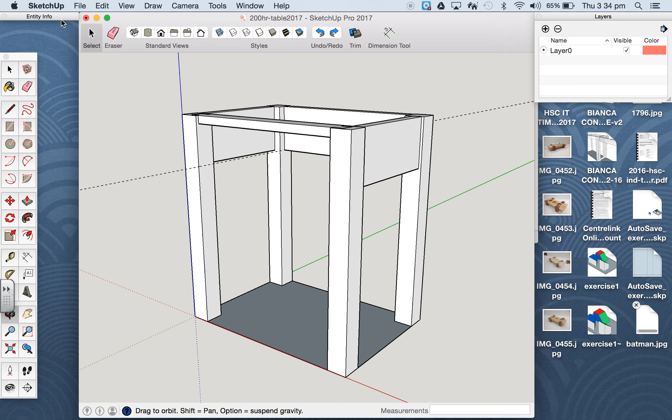Okay, so we're going to carry on with the table drawing. The next piece we're going to draw is the divider at the bottom of the drawer that goes from one side to the other. Notice I've placed a guideline here. That guideline is level with the bottom of the back rail there, 100 millimeters down from the top.

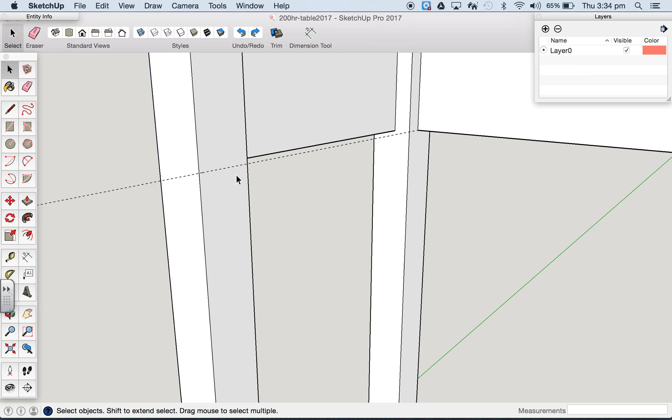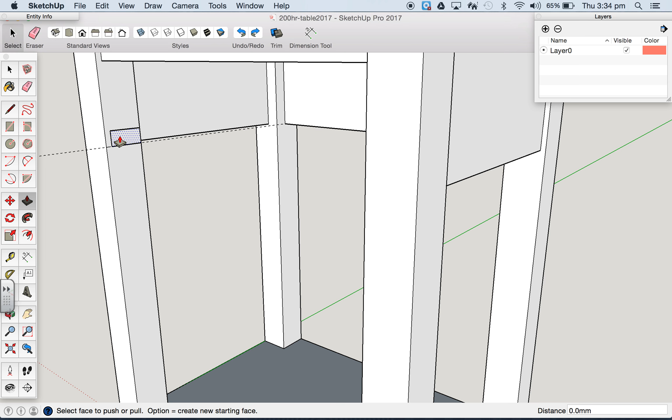We're going to start by drawing a rectangle from the intersection of that guideline at the back of the leg, going forward, and we're going to make that 16 millimeters high and 34 millimeters deep. Now notice that when I did that, I didn't have the leg in edit mode, so it's not actually part of the leg, although I drew it on the leg. I'm allowed to push pull across and touch the front of this leg, which means that it now spans between the two legs. It's touching the inside, but not going any further.

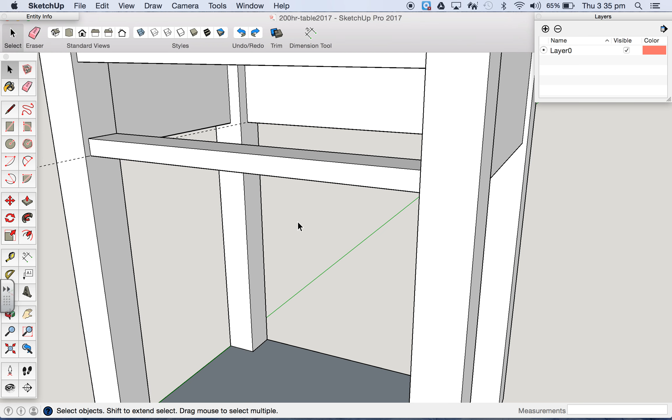Going to make that a component, or in this case no, just a group would be fine. So triple click, make group. Now I'm going to put some tenons on the end of it. So I need to open that in edit mode. Notice I've got the view options of component edit as hide rest of model. I'm now going to go around to the side here. I'm going to draw a tenon on the side here. I'm going to put a guideline in from the top. I'm going to come down 5 mils and do a rectangle from the back here.

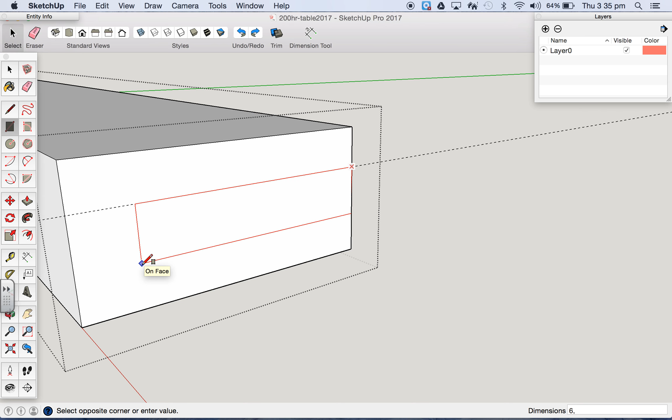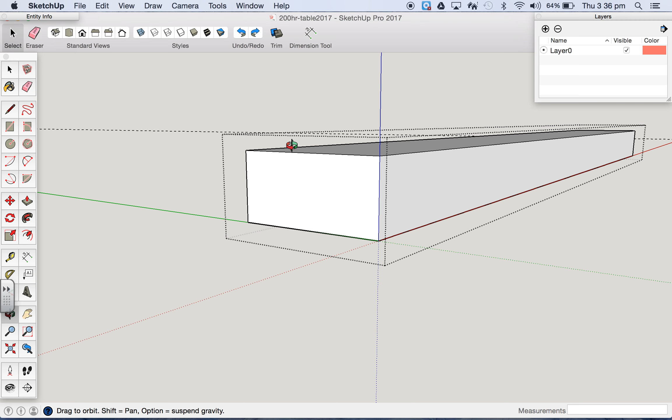And that will be six, 30. Push pull will come out 15 millimeters, and we'll do the same on the other end. Guideline from the top, 5 mils, and a rectangle. 6, 30. Push pull, 15 mils.

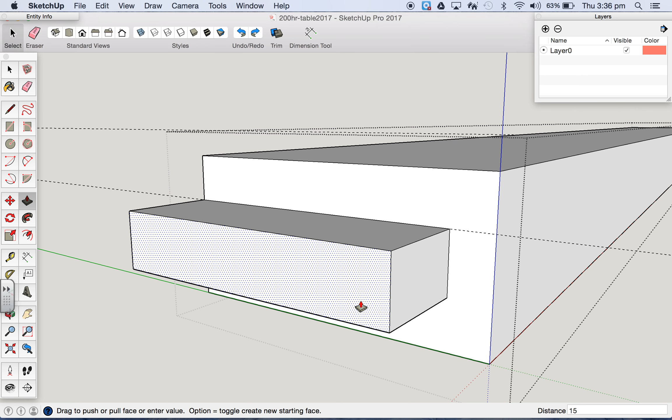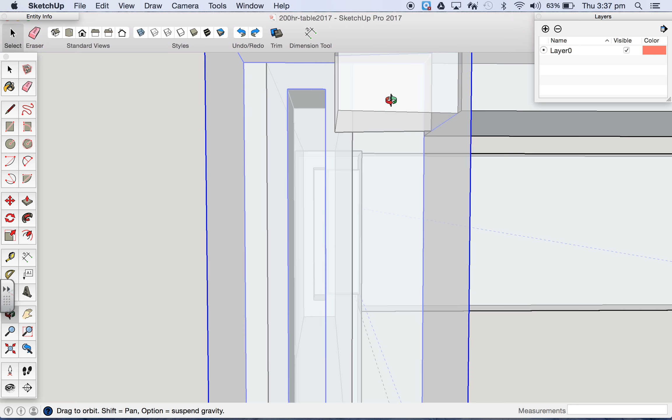Right, so you can't see them there, but if we were to turn the X-ray mode on, you'll notice that they go in there. They also clear any of the other joinery, so they're not in the road. Having a look at the top here, you'll notice that although this tenon does go below, this tenon goes above where the dovetail is, there's no overlap there because there's a bit of room there. So that could get a bit close later on. We might want to reconsider the height of this tenon at a later date.

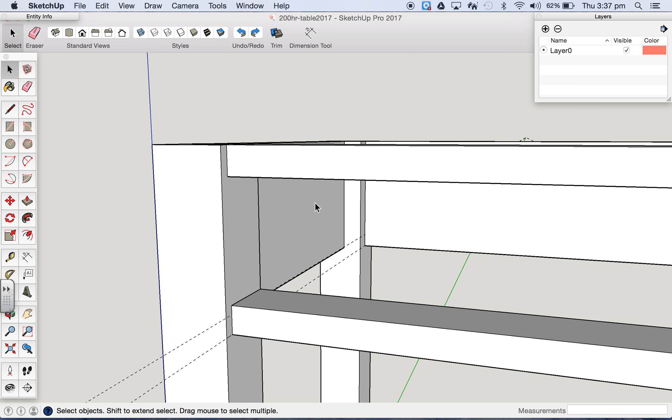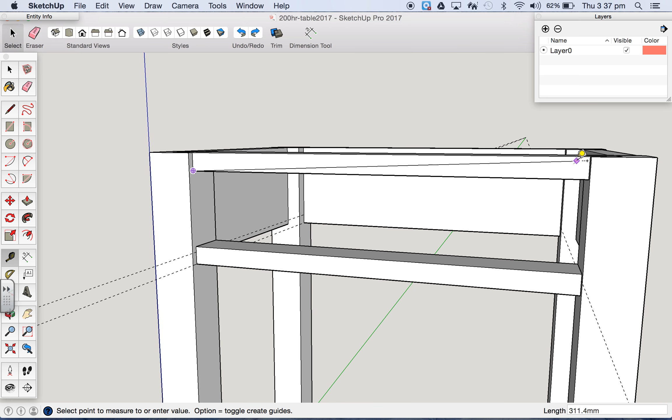Okay, so we now have, turn the X-ray mode off, the bottom divider, the top divider, the side rails and the back rail. Next job is to draw the drawer. We could draw a rectangle across the front here to get the right size, but we know that the size is 320 by, let's measure that, it's 68, so it's 320 wide and 68 deep.

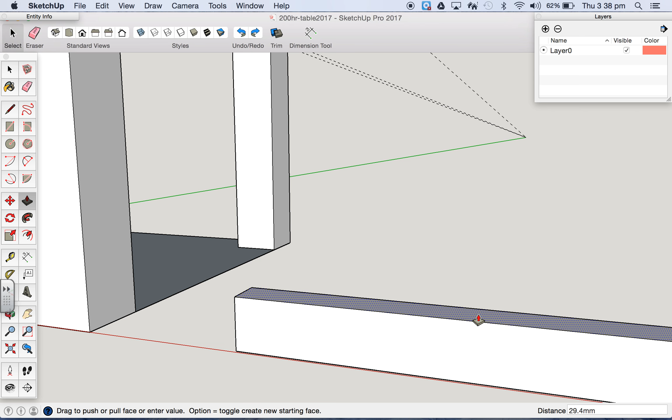So we'll come over here and we're going to draw separately a rectangle on the ground. That rectangle is going to be 320 by 19, and it's going to be 68 millimeters high. I'm going to triple click that and make that a group. Triple click, control click, make group. We don't need to make it a component because the back is actually going to be different to the front. It's going to be a different size and everything.

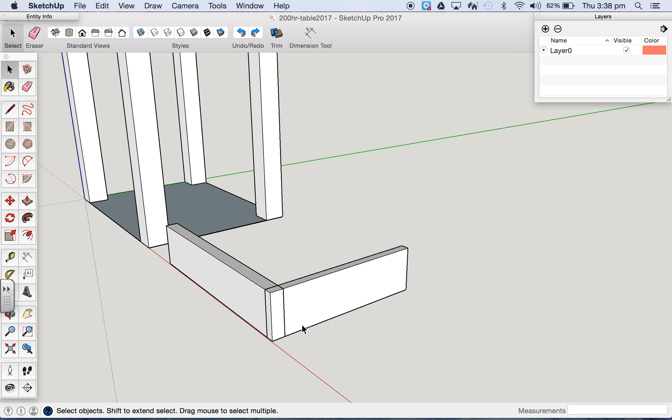So now we've made this a group, we need to make the sides. We're going to draw a rectangle starting at the front corner there, and going back, and it's going to be 240 millimeters by 12. And it's the same height, so we can push pull that up, touch the top there. Notice that they're intersecting. We're going to double click, triple click, and make that a component. We're going to call that the drawer side.

And once we've done that, we're going to copy that using the Move Copy tool, M for Move Copy, and we're going to copy that across with Alt to the other side. Now we need to flip this. Whenever you copy something, we want it symmetrical, mirror symmetrical across the middle. So we flip that along the red axis.

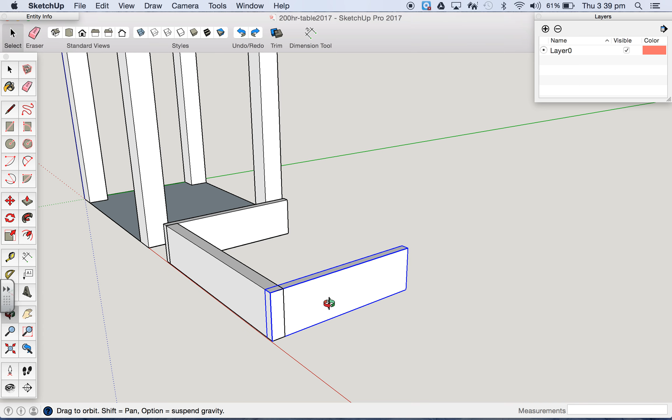We're going to mark this out now for the dovetails. So we're going to use the tape measure tool to find the center. Now you'll notice I put it on this edge here and it'll click on the center in the middle for me automatically. Now I'm going to put some guidelines each side of the middle, 6 millimeters up, 6 millimeters down, and 7 millimeters from the top, and 7 millimeters from the bottom.

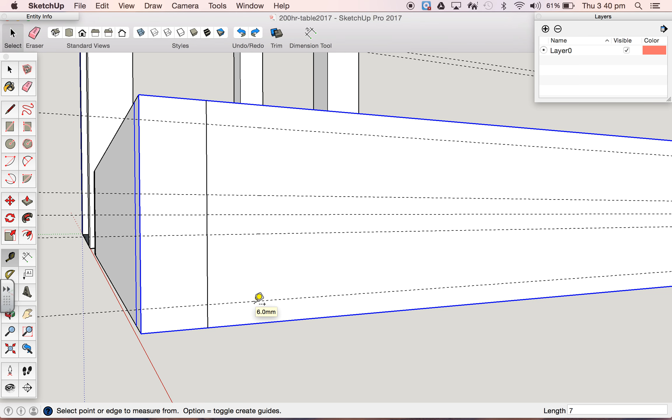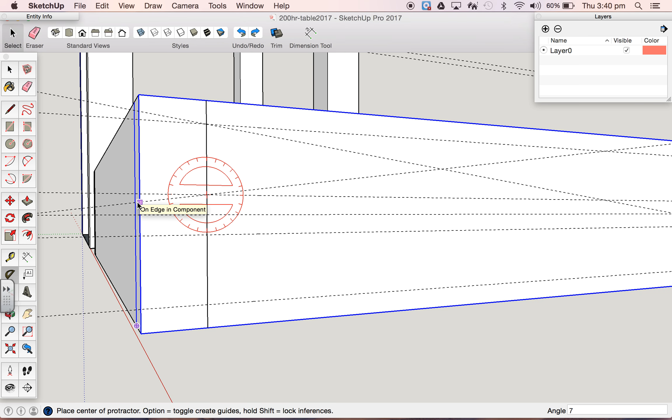Now we need to use the protractor tool for putting some angled lines. So center the protractor, create the arm, move it, and type in 7 degrees. First one goes up, second one goes down 7 degrees, next one goes up 7 degrees, and the bottom one goes down 7 degrees. The 7 degrees is the same angle as the dovetail squares we have in the room.

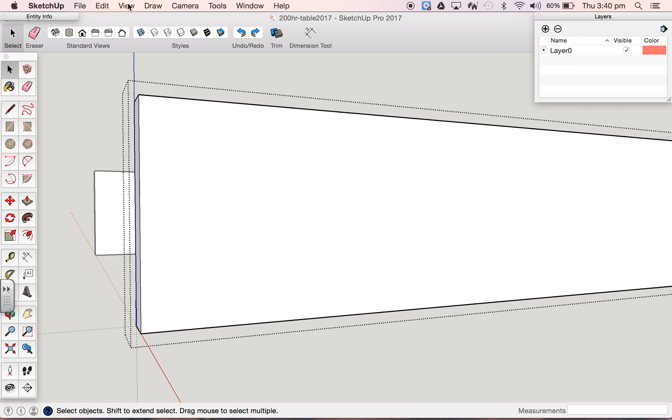Now that we put the guidelines on there, all we need to do now is open this side in edit mode. Now the drawer front's disappeared, we want that back again, so we're going to change the component edit, hide rest of model, select that, so we can see the rest of the model, including the guidelines. And we're going to use these guidelines to trace some lines onto the sides to create a dovetail.

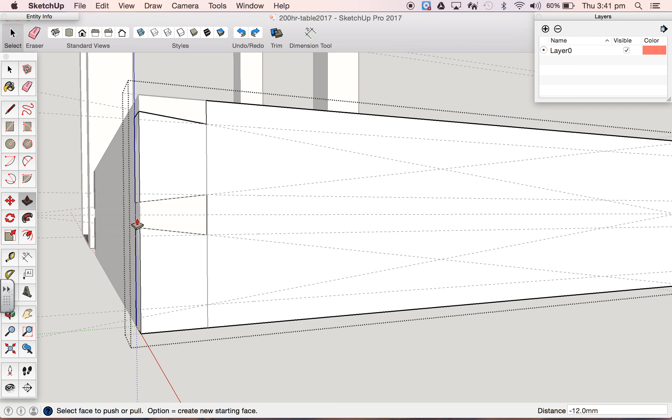So isolate that little bit there, we can push that through to the back of the object. Isolate this one, lines there, we can push that through now, and finally down the bottom here. Notice the X tells us when we're intersecting with the object and the guidelines. Okay, so we now have a dovetail on the end of this side here, but we don't have sockets on the end of the front.

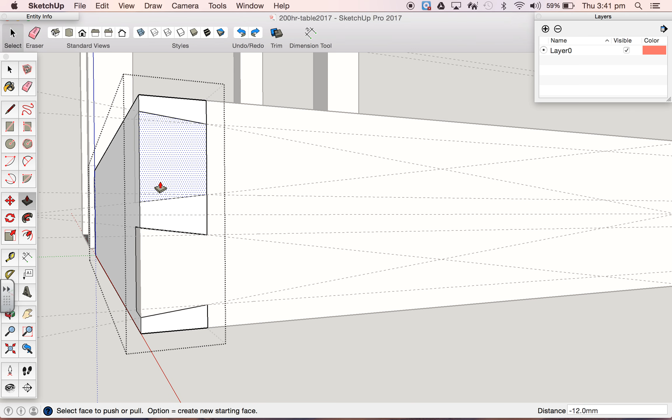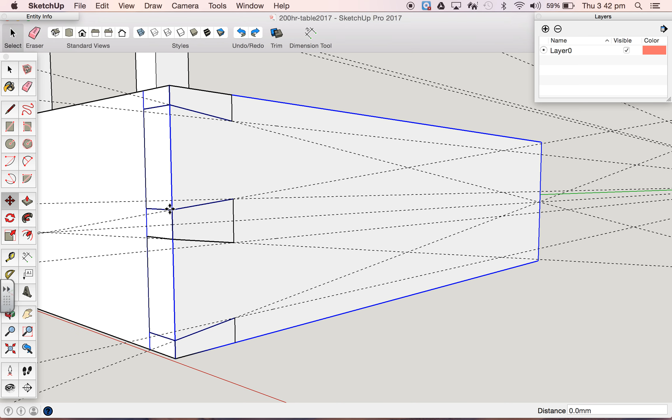So we need to now double click on the front, draw the lines again, and now we can push those out. And we have both pins on the front, tails on the side, and I can show you that by just simply selecting this, and if I pull that out you'll notice that both of the components have been cut to the right shape. But we haven't done the other end.

We've got tails there, okay, but we haven't got the pins cut. And you'll also notice that I probably didn't copy that in the right position. I need to get that back there. So we've got tails on the end of our side because that's a component, but we don't have the sockets on the end of our front. So by opening the front up for edit mode, we can trace the tails that are already there onto the end of our pin board.

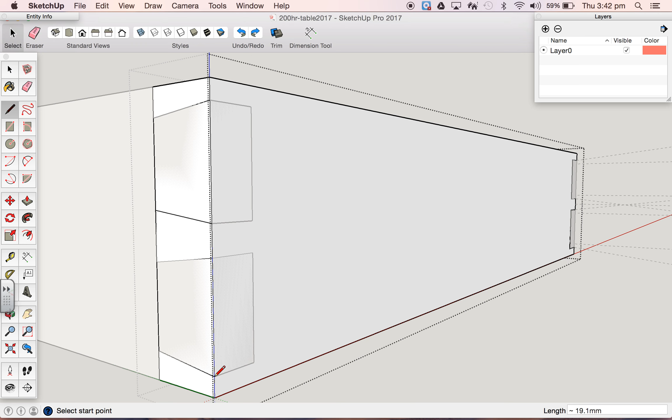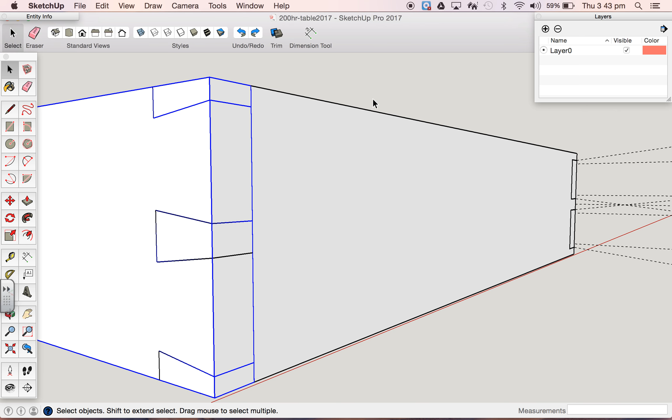And we can push those out. And again, so we can illustrate that by moving that out temporarily. And you notice that both pieces are cut. So that's the dovetails. And we use dovetails on a drawer because they have directional strength. They're a lot stronger in this pull direction. And that's the strain that generally gets put onto a drawer. So having a dovetail there improves the strength of that joint.

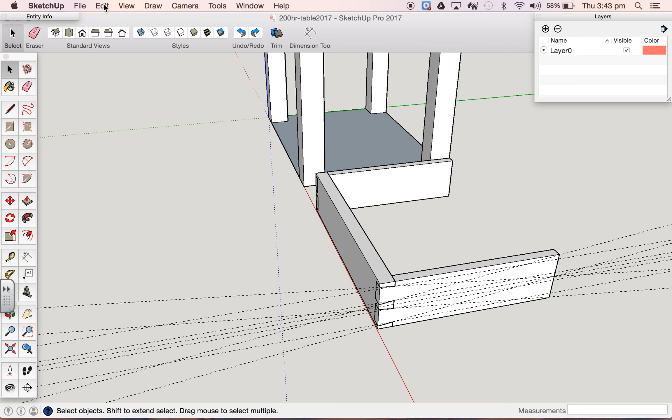But we don't need it for the back in this case. So we don't need these guidelines anymore. So I'll get rid of those, delete the guides. And we're going to create a groove in this component here, going down and through the job. So we need to edit that. So we're going to open that in edit mode. We're going to remove the rest of the job so we can see what we're doing. And we're going to create a groove that goes along the bottom here.

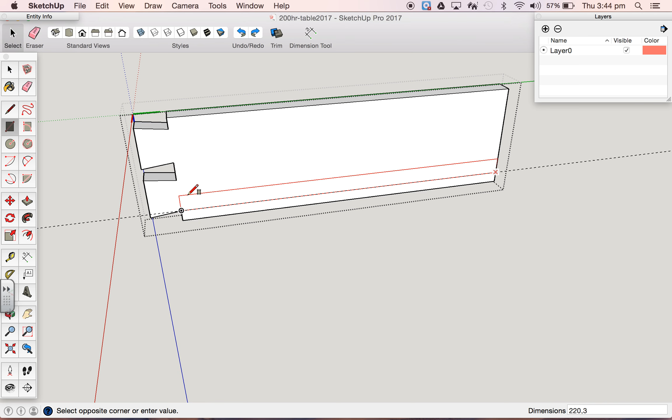A guideline that comes up to the bottom of that dovetail, 7 mm, and a rectangle that goes from the back right through. That is 220, 3 mm. Whoops, where'd that go? Went the wrong way. Maybe it needs to go 3, 220. And we're just going to push that in. Just going to go in 5 mm.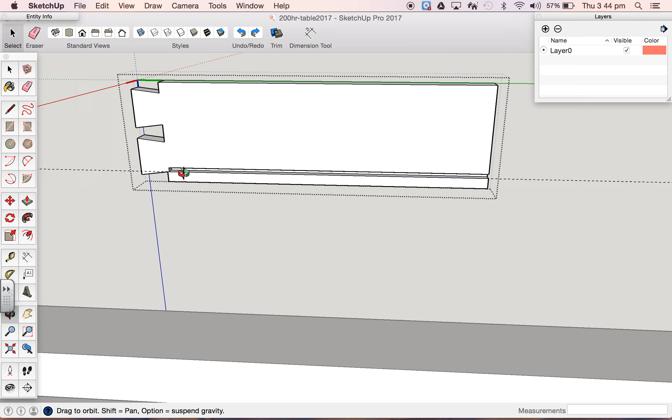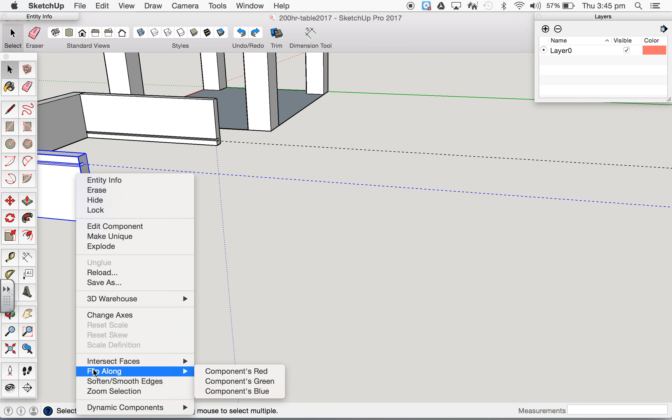Might not have gone far enough here. Need to push that in a bit further. Another 6 mils. Well, that's interesting. I noticed that this one's on the other side, so maybe I flipped that the wrong way around. Maybe I need to flip that along green. That was wrong. Maybe I need to flip that along red and along blue. That's better.

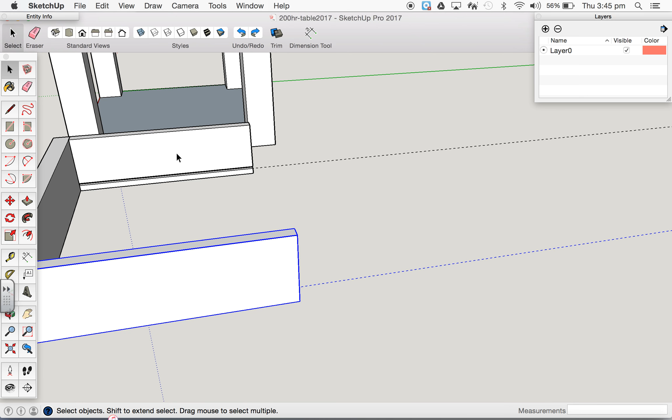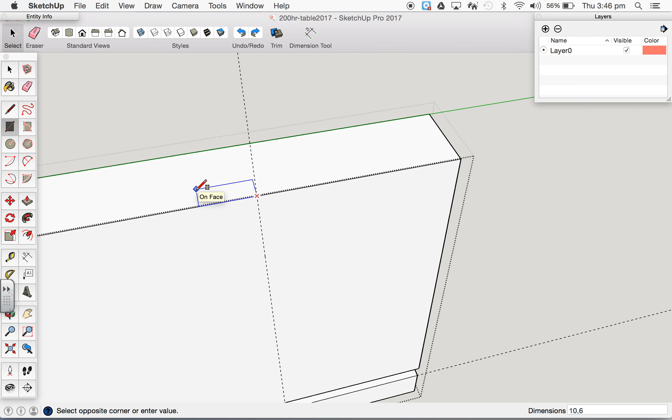And finally, we need to put a groove going down, and that's to create a rebate or housing joint for the back. Now, we don't put the back right at the back, we have a little bit in. We're going to come in 30 millimeters, so we'll just do again a guideline in 30 mils. We're going to draw a rectangle at the top here. That rectangle is 6 by 10, so 6 millimeters, 10 millimeters. Wrong way around. 10 millimeters by 6. And we'll push that down until it reaches that groove at the bottom there.

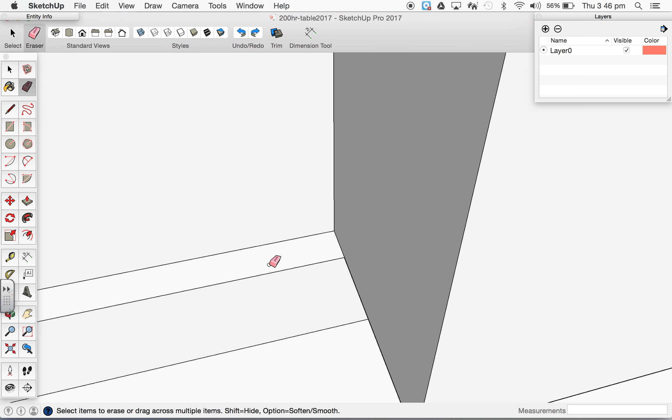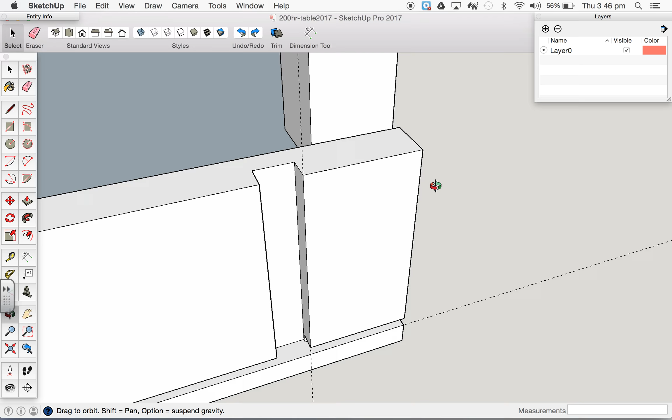Erase that little bit there. Should have made those the same width, but it won't matter in this situation. Okay. The other one should be on the inside edge. Just double check that that's the case. There it is. That's the rebate joint.

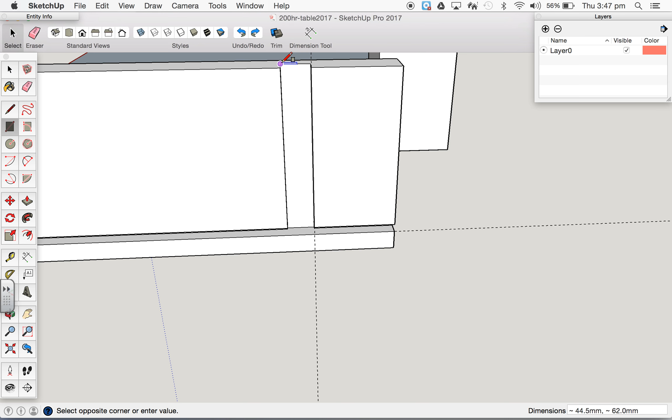Then finally, what we need to do now is draw a rectangle in that space to create the back out of. And it's just a simple matter of taking it out of edit mode, drawing it from the top down to the bottom, down to there, using the push-pull tool to bring it right across to the other side, click. Now I've made that a bit longer than I need to. I might push that up so it's level with the top of that groove there.

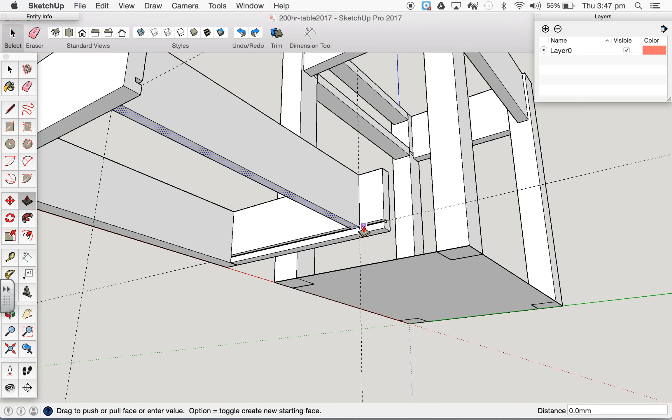Double click, triple click, make that a group. We'll come to the end of the drawer. I think we'll stop there, and I'll make another video for the rest of it later.